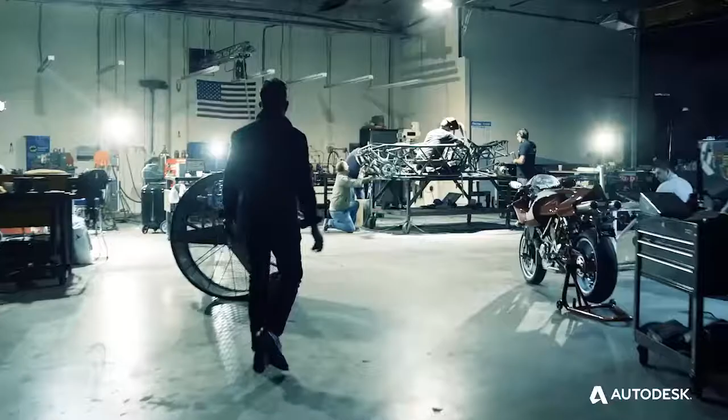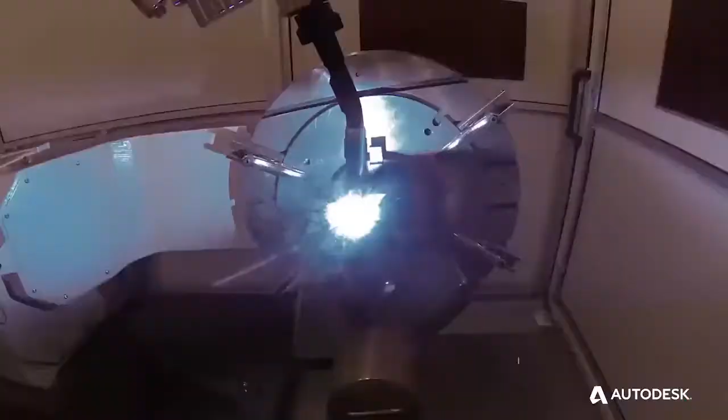Let's talk a little bit about what Autodesk does. At the core of what we do is our vision and our mission, which is to help people create a better world. And to do that, we need to empower them with tools and technologies that lower the barrier to entry so that more people can participate in the process of designing and manufacturing great products that change the way that you and I live our lives.

So when I was a student and I went to school, I really went there with the understanding that once I'd qualified in my profession, I would join industry as a practitioner, working for somebody else to help bring their ideas and concepts to life and take them to market.

Now things have changed. If I look at people that I meet and work with in the marketplace today, most of those people coming into industry don't want to work for somebody else so much as create their own vision and find their own path in the world.

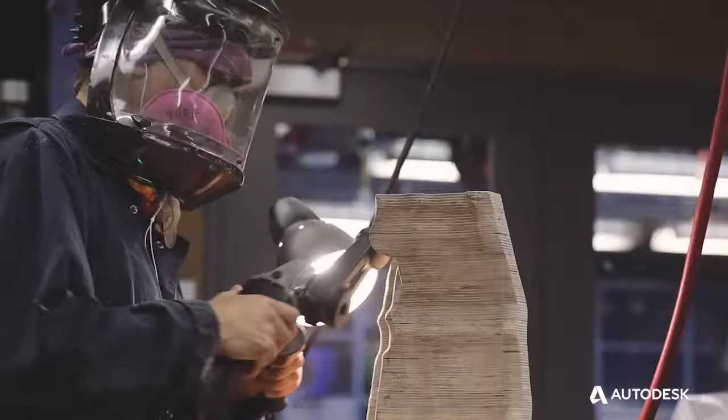And what I find inspiring is that we see a convergence of trends that are really helping people lower barriers to entry so that they really can pursue their own career and lead businesses of their own and take their own products to market. So let's start by talking about some of those trends that we see in the marketplace.

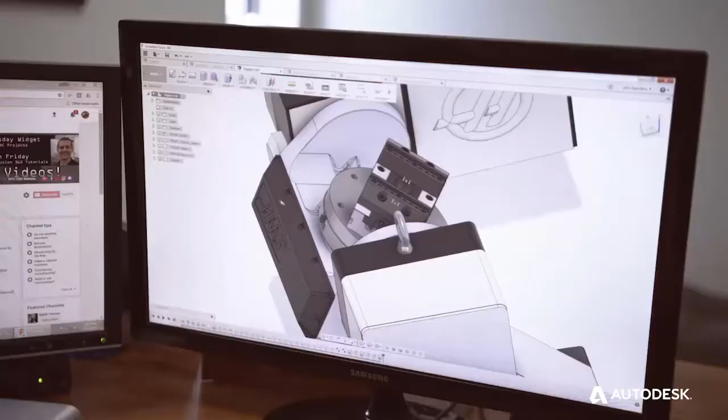Most people, when they develop products, think of the traditional product life cycle: from concept through engineering, manufacturing, to sales, use, service, and eventually end of service or end of life.

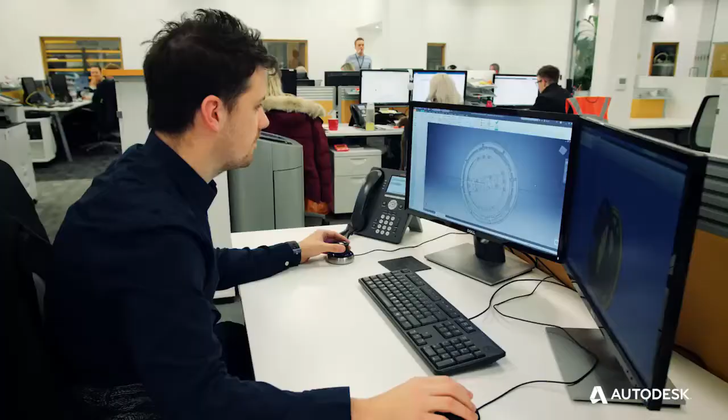But the ability to connect to a product and gather data about its usage turns that linear process into something that's more cyclical, iterative, agile, that enables you to iterate on a concept and create more innovation in what you bring to market.

And these two trends, the ability to connect data and change the way that you manufacture products, also means that we're starting to be able to employ things like machine learning and really understand or leverage the computer to develop more interesting, innovative concepts, where machine learning algorithms actually assist designers and engineers in how they do their job.

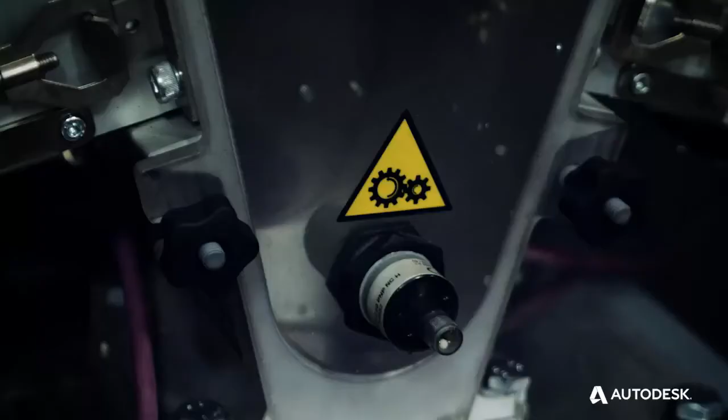So if you think about 3D modeling as a concept, as a discipline in design and engineering, you can see that in this case, actually the beauty of this product, its innovation, doesn't lie in the industrial design or the 3D model, which is relatively simple to represent.

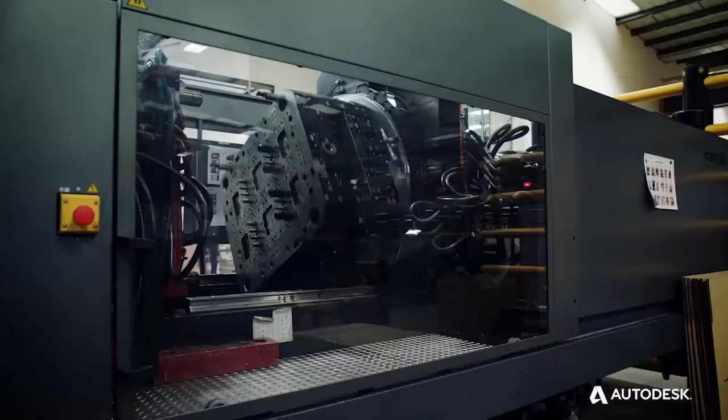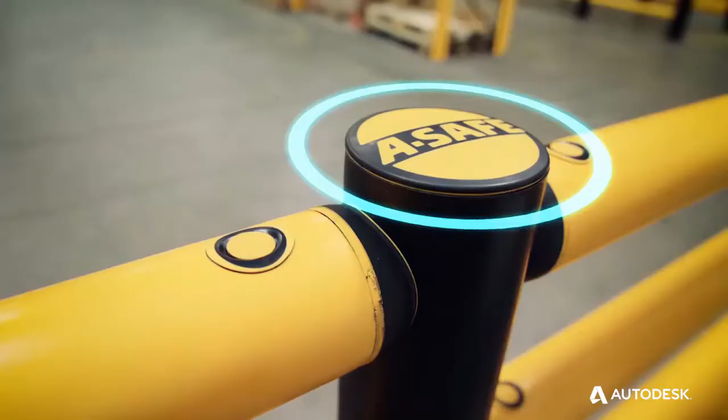It's actually the intelligence that's embedded in the electronics and its connectivity to the cloud, and their ability to use machine learning to analyze that data and make more informed predictions for store owners. And that tells you a lot about how people are going to differentiate products with smart connectivity in the future.

And that's something we're learning on as we start to develop the tools and technology you use to bring your ideas and concepts to market.

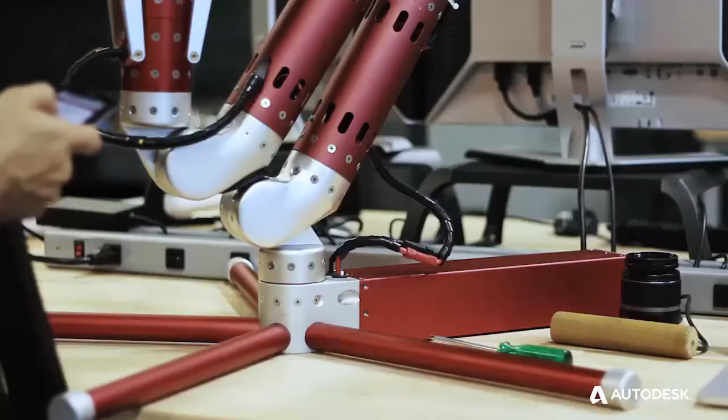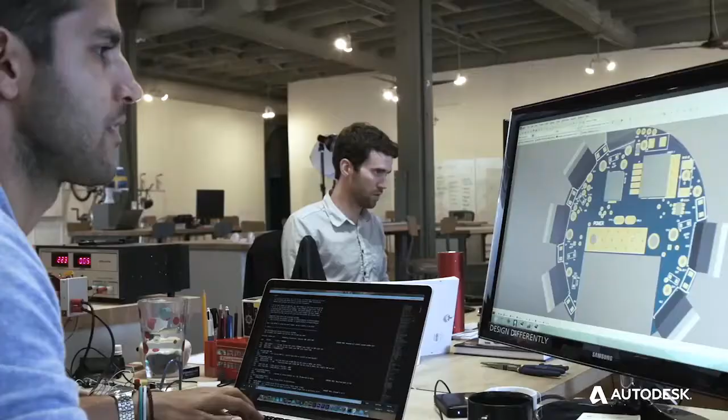Modbot are revolutionizing the world of robotics. They've taken a 6-axis robot to market in the space of just 6 months across 6 different geographic locations, across 6 different disciplines when you think about electronics, software, industrial design, mechanical engineering, and so on.

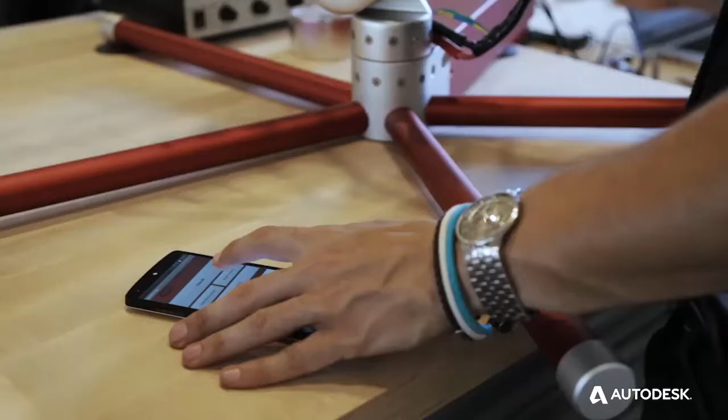And so that's an incredible challenge for a small startup company to embrace, but they've done that because they've been able to use our tools and technologies to build a single digital representation of the product that they're bringing to market. And the power of the cloud enables them to connect these different disparate geographic locations together so that they can operate in unison as one organization.

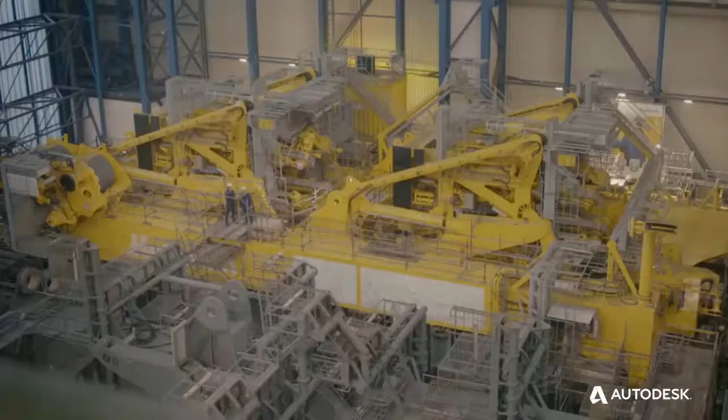So let's talk about the means of production and how they're changing and evolving. The example I'm going to show you here comes from a company called Ramlab. Now, Ramlab are responsible for the repair and servicing of large vessels, cargo ship containers. And for each day that a cargo ship container spends in port, it costs about $1 million in lost revenue.

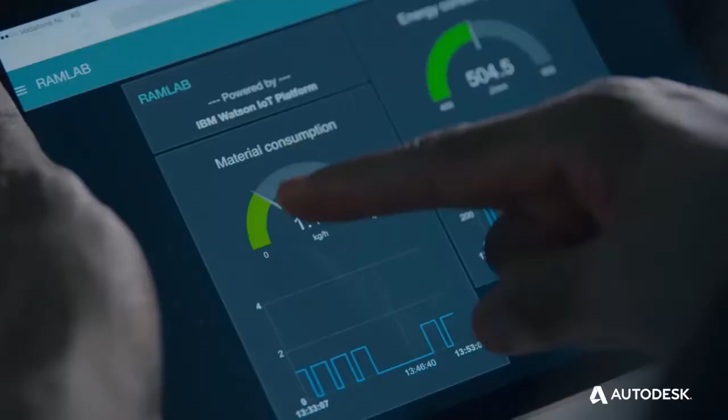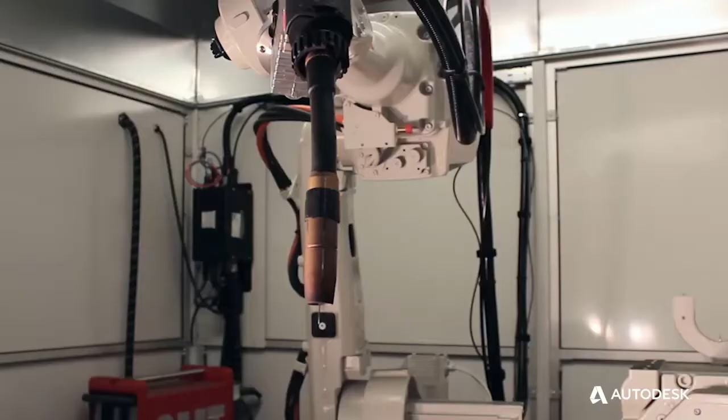So if a propeller blade breaks on one of these cargo ships, it's critical that they're repaired as quickly as possible. And what you can see in the video is that Ramlab have used this next generation production technology, in this case high rate deposition, to allow them to use a 6-axis robot to literally 3D print a propeller blade and then finish machine it with conventional multi-axis subtractive machining.

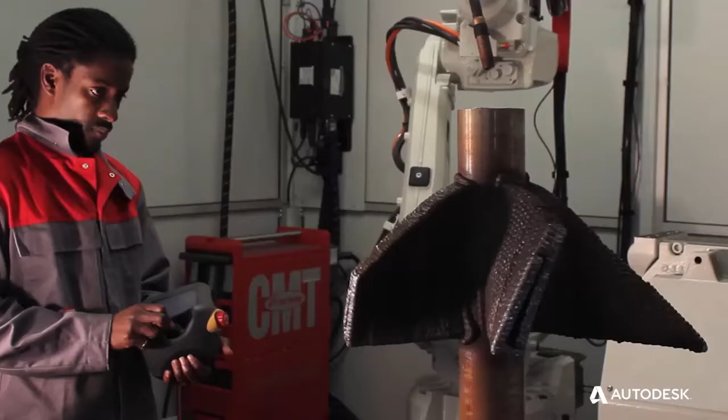They're able to manufacture at the point of demand with a physical asset that meets the needs of that vessel within a day. That's a huge change in the way you design, because as a designer you're traditionally taught that it costs more money to remove material from stock inventory, so you should try to maintain a design as close to stock material as possible. But when you employ techniques like additive manufacture with metals, the more material you leave in the manufactured part, the more expensive it is to produce. So it turns some of those conventions upside down, and that means you as a student and practitioner in industry need to rethink and relearn the way you approach design.

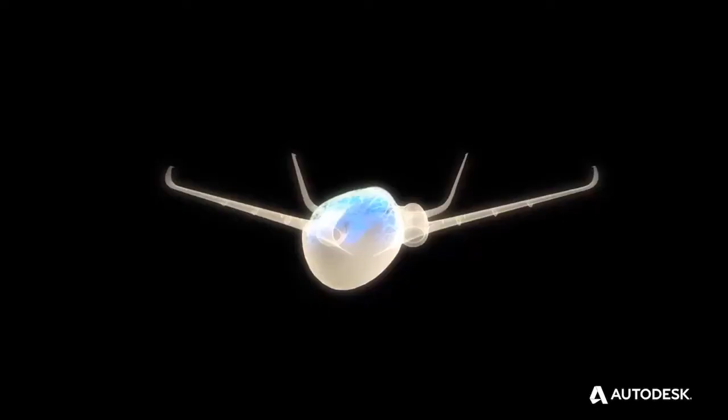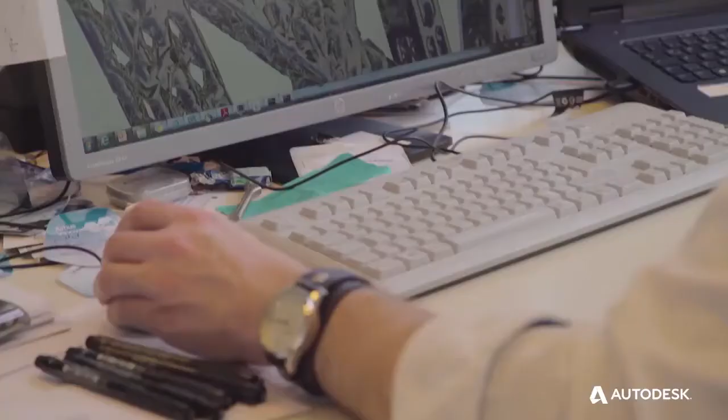We employ a technology called generative design. In the example I'm showing you here, we employed that generative design technology with Airbus to help them with their next generation of aircraft fleets. They have a corporate objective by 2050 to reduce 50% of CO2 emissions, and so they need to be able to lightweight their aircraft of the future. We're working with them to evolve and adapt generative technology to help serve that need.

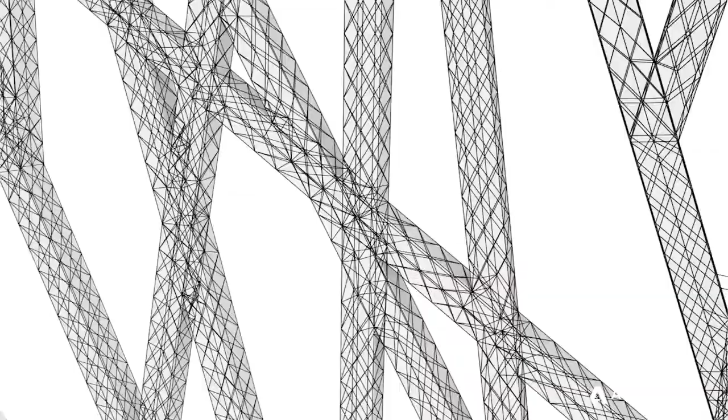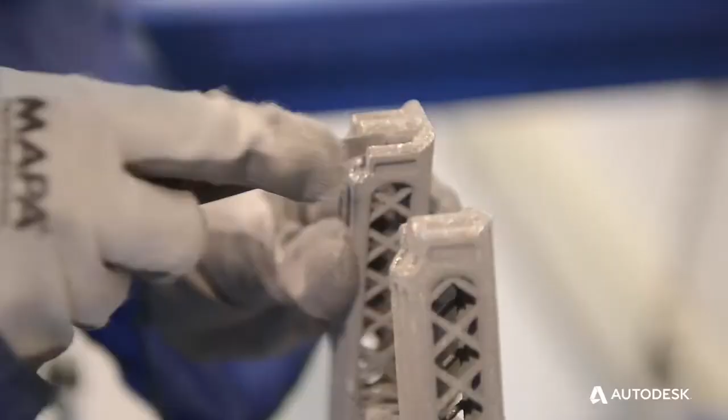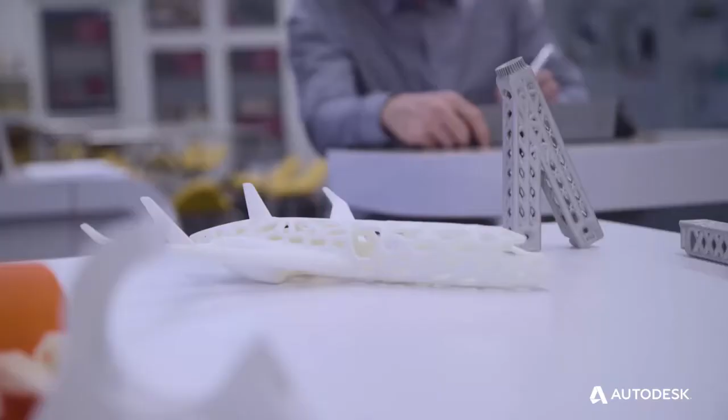They decided they wanted to take generative technology and apply it in their existing product lines to experiment with it in real aircraft conditions. The example you see on the screen is actually a bulkhead from an aircraft today, which the steward's jump seats are attached to for aircraft takeoff and landing. It's important that they stand up to FAA regulations, and this provided an ideal opportunity for Airbus to test that concept out. They leveraged generative design to fully explore the solution domain.

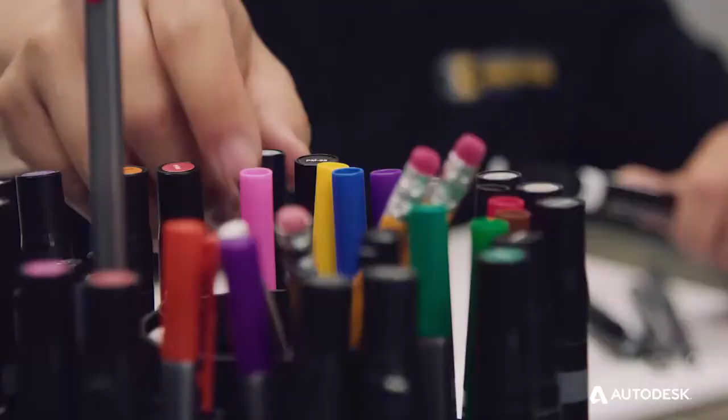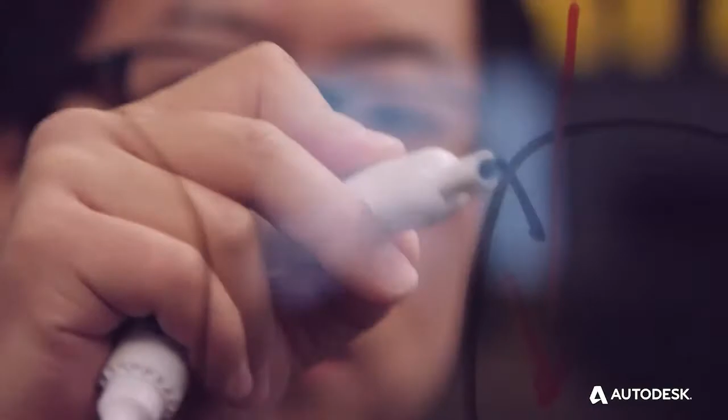If you imagine a simple engineering problem has maybe 3 or 4 variables that you can change as you start to meet the market requirements you as a designer are trying to serve—things like material, displacement, loading, the support structure, how you assemble the product, what manufacturing technologies you use—all of this can be varied to meet the market requirements you're trying to solve for as a designer.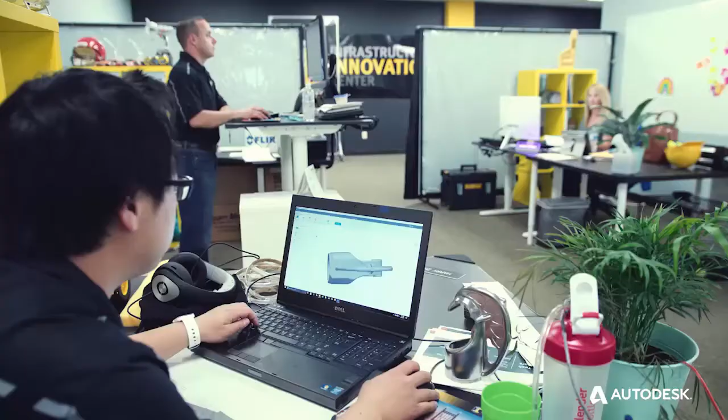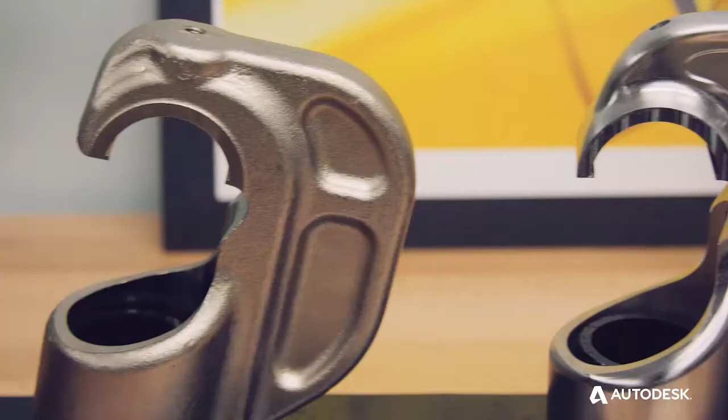Our generative technology leverages the power of the cloud to parallel compute thousands of different iterations that span that solution domain, and then we provide visualization technology that allows you to pivot different design properties like displacement, stress, material, manufacturing technique, volume, weight. As you pivot these different properties, you can look at the different results, and the generative algorithm will help identify maybe the top 10 possible results depending on the different market requirements you might be trying to solve for.

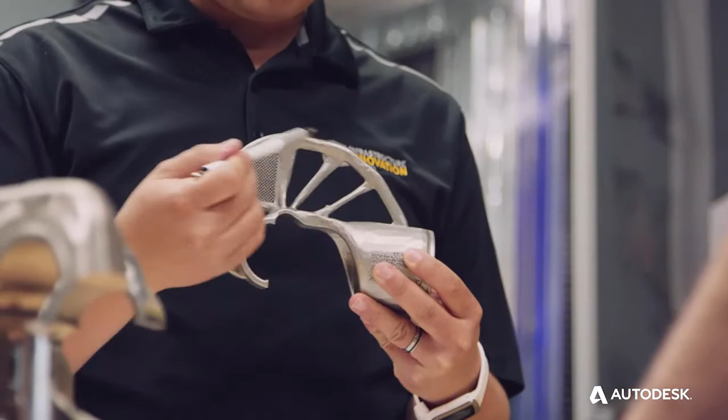So it doesn't replace a designer. What it does is automate the process of defining the 3D geometry, and it puts the power back in the designer's hands to do their core job, which is to make trade-off decisions based on market requirements and manufacturing constraints. Generative technology really represents an investment that Autodesk is making in the future of manufacturing and design.

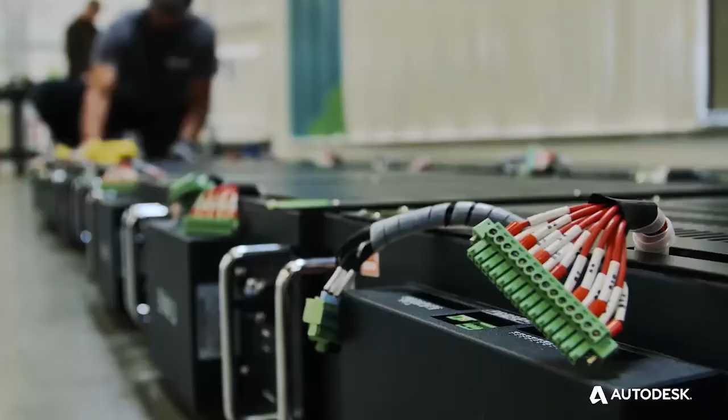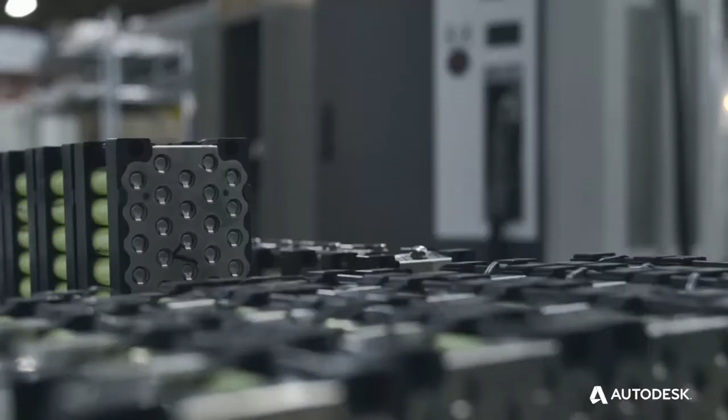Let's talk a little bit about connectivity, because there's this massive pool of information you can make use of as a designer to help better inform the designs you create. That information comes in a variety of different forms. It can come from the design process itself, from RFQs logged by customers at the purchasing phase of the product development process, but it can also come from products out in the field and from your own manufacturing processes.

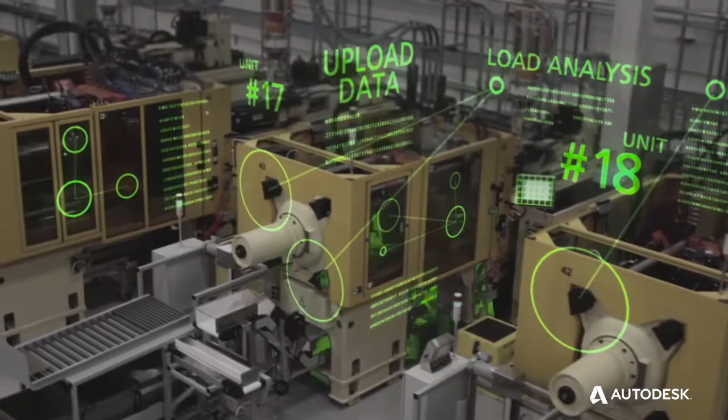For every piece of manufacturing equipment you use in your production facility, huge amounts of information are being generated every time you run them, which you can tap into to make more informed decisions about not only the product's design, but the manufacturing process you'll employ to produce it.

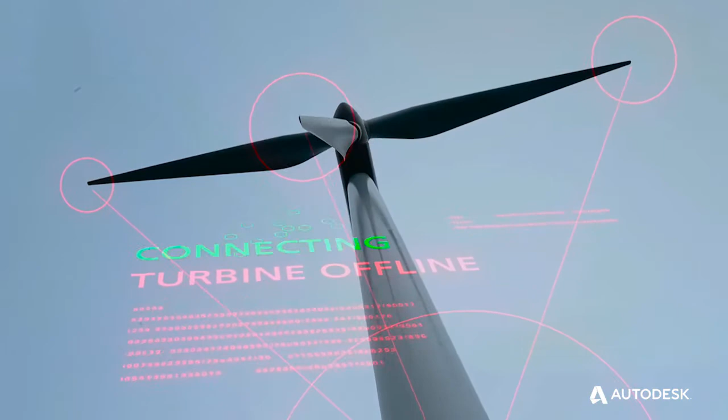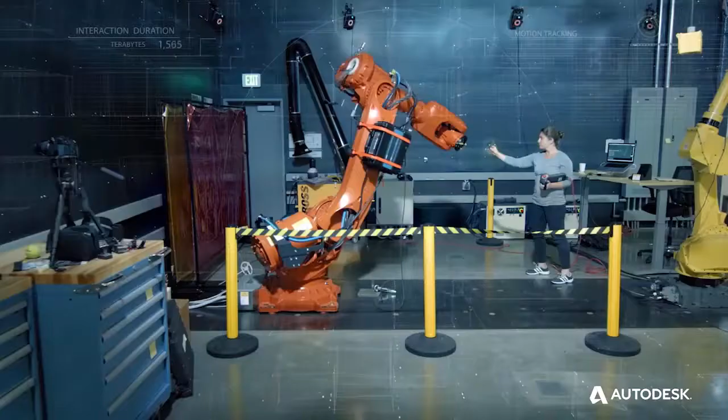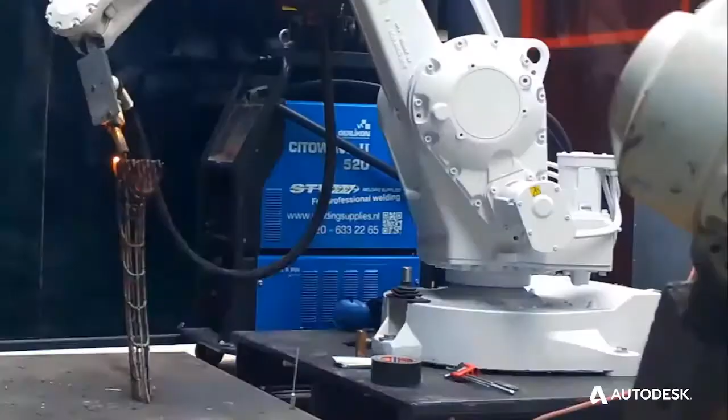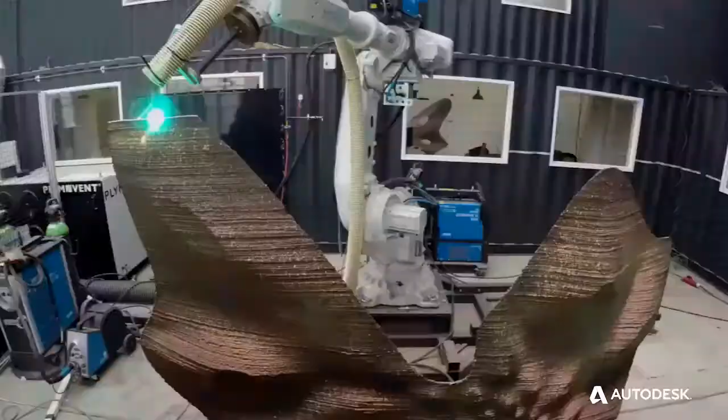Human beings will work side by side with machines. Our belief is that that exact same transition is going to happen to the design and manufacturing market, and it's a process we call push-button manufacturing. It doesn't simplify manufacturing—what it does is automate the parts of the design and manufacturing process that are formulaic and process-driven, meaning human beings will spend their time and effort in the creative process. That's really what our company stands for. It creates the opportunity to empower you as the individual to take this technology and apply it in a way that literally allows you to make anything.